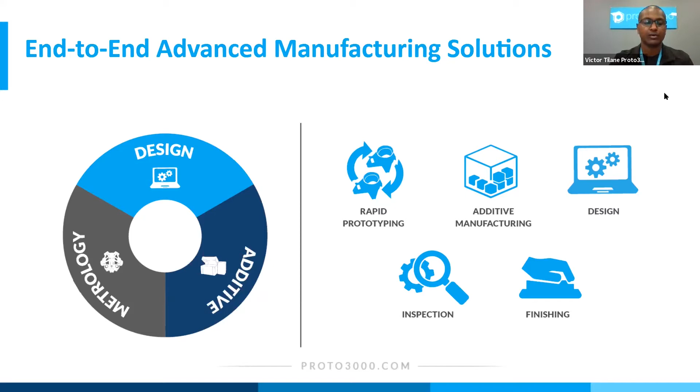Now, a lot of people ask us, why is manufacturing changing? Well, honestly, if the last 6 months is any indication, it's because it needs to. In the last 6 months, we've worked with quite a number of clients who have got a hold of us and said, hey, we're having massive disruptions in our supply chain. Can you help us? So that's where we've been able to use a lot of our additive manufacturing technologies and put it to the test.

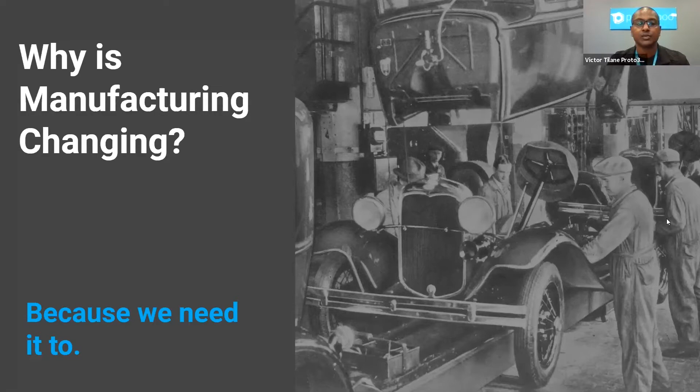I'm doing this presentation today, and we're just wrapping up close to about a 500,000 face shield order that we're satisfying for some of our medical clients. So we're able to turn things around pretty quickly, and especially in the last about 6 months, additive manufacturing has played a massive role in terms of filling in some of the issues in the supply chains. So what is additive manufacturing?

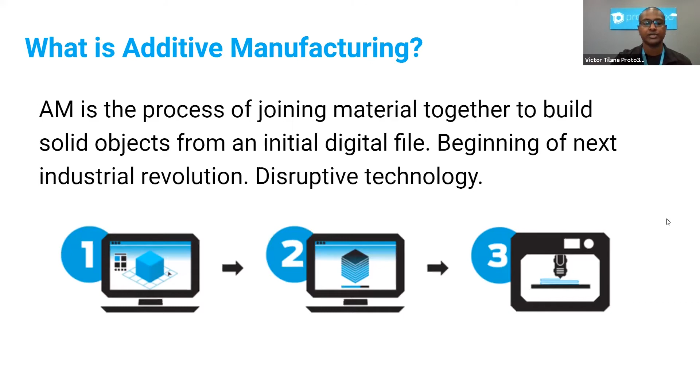Generally, additive manufacturing is the process of joining material together. Whereas in traditional manufacturing, you would take a block of something and machine it off. We start with nothing and grow it up from there. There are lots of different technologies that include this, but generally you start with a 3-dimensional CAD file. We're able to slice it, design it in a way and develop it so it can be read by a 3D printing machine, and then we send it to the 3D printer for producing.

GE, General Electric, has a really good saying that additive manufacturing is a transformative approach to industrial production that enables the creation of lighter, stronger parts and systems. This is very interesting because now you don't necessarily have to just make one part. You can actually make assemblies that are functioning as well. Additive manufacturing delivers a perfect trifecta of improved performance, complex geometries, and simplified fabrication.

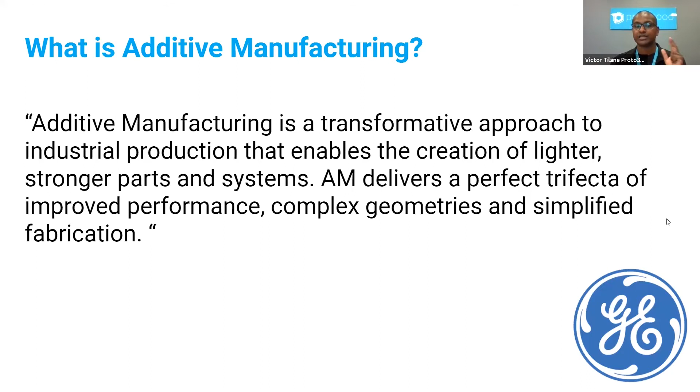So why additive manufacturing? Well, usually when people ask us for why additive manufacturing, they're already working on a traditional pathway or workflow. And the traditional workflow is already designed, and it's very compliant in a way. Now with additive manufacturing, when most people started integrating it, it was for rapid prototyping. With rapid prototyping, it shortened up the product development life cycles for a lot of companies.

In fact, I used to work at an injection molding company where we were able to tighten up that development life cycle from about 12 months all the way down to about 3, because we were able to use 3D printing and additive manufacturing for prototyping purposes. So by the time you went to actually manufacturing the final product, you're now at version 8 or version 9 of that product generation, rather than just having a single revision of the product.

Now, once you totally digitally optimize the designs, it opens up a whole different ballgame, right? The typical application or the way that additive manufacturing was integrated was, hey, we want to make this one part using a classical method. What 3D printing technologies are there to match it? Well, the new way of looking at it is a lot of companies and all of our clients are thinking, if we design this product for additive manufacturing, what would that look like?

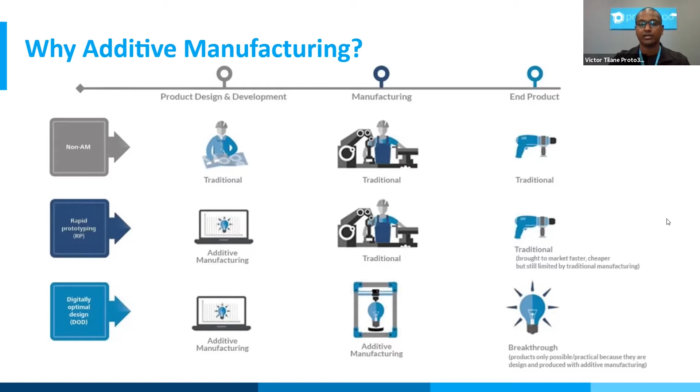So additive manufacturing equals design freedom and innovation. When you use additive manufacturing design and production workflows, you can consolidate assemblies, simplify your supply chain, and obviously improve the functionality and performance of the part. You can also unlock advanced lightweight, high strength geometries and topologies using some of the great softwares we have available. You can essentially eliminate non-cost effective or potentially poor performing parts as well.

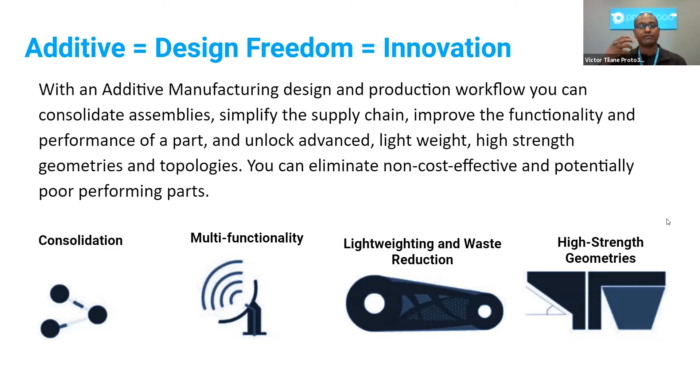So it transforms the way that you look at the way you design a product, the way the product functions at the end of the day, and maybe even sometimes the environmental impact and the sustainability of the product and the business as well.

So global adoption drivers for additive manufacturing are right across the board. Obviously, low-volume production has been a great adoption driver. A lot of companies that are looking for low production or high complexity or multi-sized production lines are looking into additive manufacturing, especially considering the new technologies and materials that are out there. Life cycle sustainability is a big thing.

Additive manufacturing is a highly optimized manufacturing process. There's as little waste as possible when you manufacture using 3D printing technologies. So as a result, companies can now use additive manufacturing as part of their sustainability value set.

Increased part functionality is another benefit. One of the ways you can design more functionality into a part, where it may not have been able to be manufactured using a classical method, is to now use 3D printing or additive manufacturing to make these parts.

Supply chain realignment is a massive driver in additive manufacturing, all the way from getting prototypes to initial market products to production parts, and even replacement parts programs at the end of the life cycle. Several major companies and programs around the world have announced they want to start using, or have already started using, additive manufacturing for their replacement parts programs, including some major automakers and electrical equipment and appliance manufacturers. That's a major driver happening in that area.

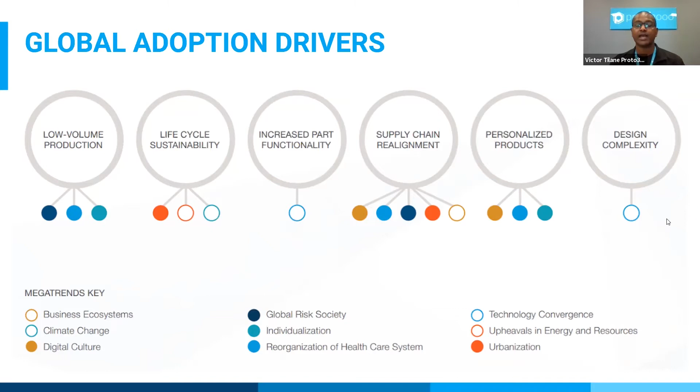Design complexity is another factor. You can design components for additive manufacturing that are highly complex—parts that may not have been able to be injection molded or machined can now be achieved using additive manufacturing capabilities. You can look at the shoe industry, for example, where there are several highly complex shoe designs that would never have been able to be manufactured any other way.

So just to wrap up, the advantages of additive manufacturing are essentially design freedom and market agility. You can mitigate the risks of tooling by testing things out very early on, reduce costs of the entire program, and achieve efficient low to mid volume production.

There's also a flow of companies looking to go from mass manufacturing to mass customization—we're seeing quite a bit of that. Additive also allows you to fail fast, fail often, and fail cheap, essentially letting you iterate very quickly through generations of product development, so the product that comes to market is relatively mature.

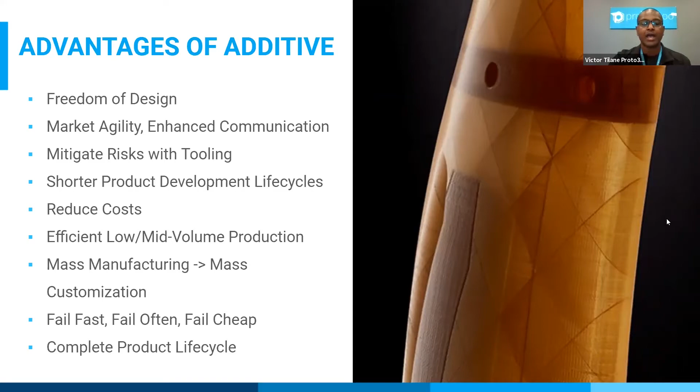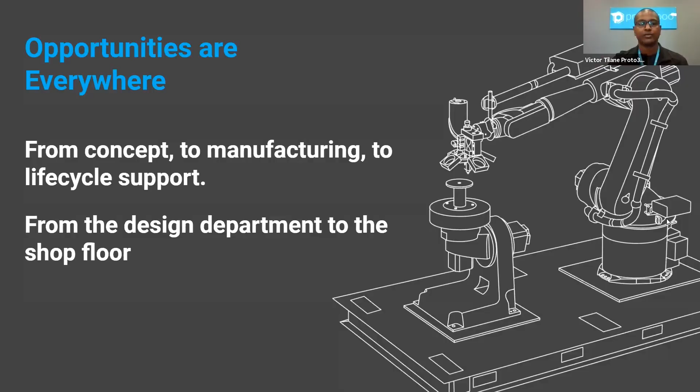And then there's the complete product life cycle. Additive manufacturing can be integrated into the complete product life cycle of a product. It has obviously, and for a long time, been used for concept modeling and prototyping.

And now more and more it's being integrated into testing and qualification of a product—for example, if a company needs to test what a certain fit looks like, they'll print that out, or you can make test parts to calibrate your automation systems.

On the manufacturing side, we're seeing quite a bit of low-rate manufacturing tooling, specialized shop aids like ergonomic fixtures, jigs and fixtures, as well as end-use parts. There are major manufacturers around the world, including some of our clients, using 3D printed additive manufacturing components on end-use products that will be out in the market for the next 10 to 20 years. It's a great application we're seeing in the manufacturing space.

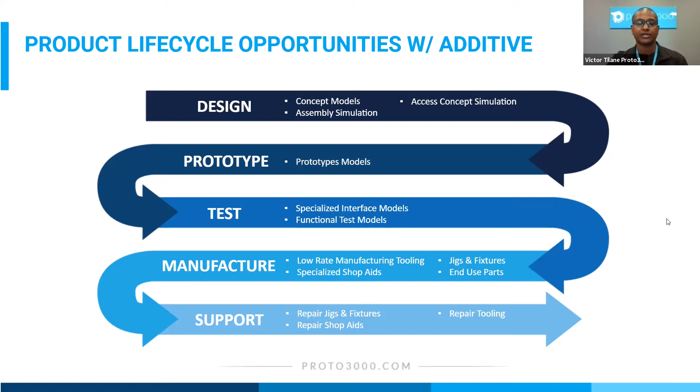And then at the end of the life cycle of products, we're seeing quite a bit of jigs and fixtures for repairing items or tools, or even using additive manufacturing parts as replacement parts programs. Having replacement parts in a virtual warehouse can be a lot more sustainable than having actual parts sitting in a real warehouse for whenever support is required. So across the board there are quite a bit of new and exciting applications and innovations in companies and programs using additive manufacturing for their benefit and future sustainability.

The most common applications for additive manufacturing have been prototyping, tooling, and production parts. In prototyping, you can improve time to market, doing things like concept modeling, design verifications, and functional prototypes. But now we're also seeing prototypes developed using additive manufacturing become essentially end-use production parts, because the parts are being designed to be additively manufactured from the start.

So after a couple of design iterations, we can essentially take that prototype and our clients can use it or sell it as an end-use item. We're seeing that kind of crossover quite a bit. And then in the middle we have tooling, where customized tooling is a major application in manufacturing, and sometimes on-the-fly designed tools that need to be applied and tested right away.

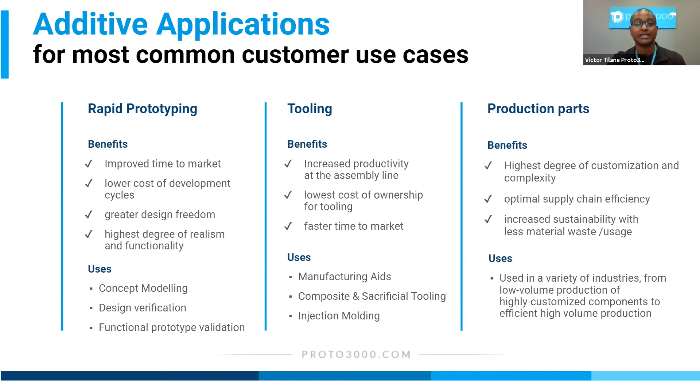We can help a lot of our customers do that, where they'll find a problem and work with them to put together a design, and then within a matter of 1 or 2 days, they'll have that tool so they can test it out in the real space. We had a tool we tested in a car automotive application where they needed a specific guide for a fastener. This was a very hard to reach area, so we designed a tool for it and sent it out to them within a couple of days. It was so successful that we ended up making several dozens of these, and this company sent it out to all of their assembly facilities across the globe. It was really exciting, a good example of tooling or additive tooling.

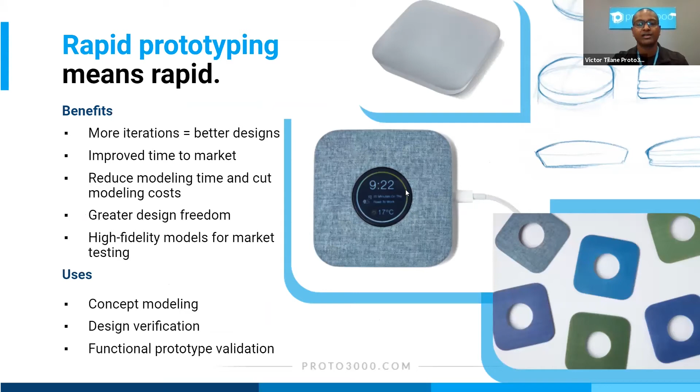So if you guys have any ideas for tooling or anything like that, let us know. We can help you on the design side as well as the manufacturing side.

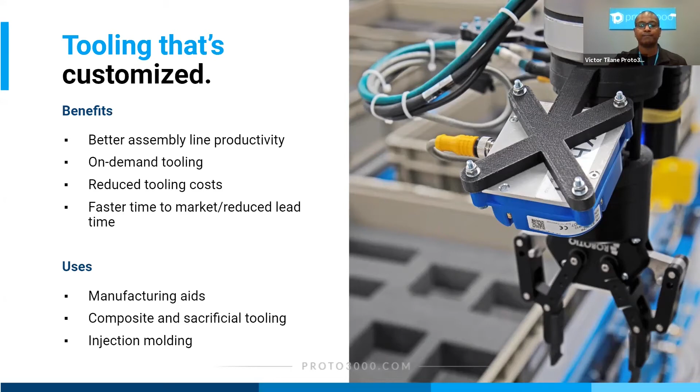More and more, from food manufacturing to automotive to general automation to even farming applications, we're seeing more companies and programs wanting to use additive manufacturing, and we're helping them make that possible. We've made tools as small as several millimeters across to as large as tools for farm equipment, where high wear items in the front of certain rigs we've been printing using our very large printers that can print 3 feet by 3 feet by 2 feet, very large parts. We've supplied these really large applications like farming and mining and those types of applications as well. So tooling is a very large area that additive is helping out with.

Now, durable production parts has been the goal of additive manufacturing from day one. However, technology is just coming around to offer high degrees of customization and optimize the supply chains by having parts that are as good, if not better, than the original parts made with classical technologies, and also made with materials that are very flexible. So we can make parts that are clear to opaque, flexible to rigid, or anything in between. We can even make parts with multiple materials in between as well.

Some of the industries utilizing this technology right now include consumer goods such as shoes, aerospace parts has been using it for a long time, and then high performance and low volume parts as well.

Excuse me, I'm going to turn off my phone here. That's very embarrassing. So let's keep on going here.

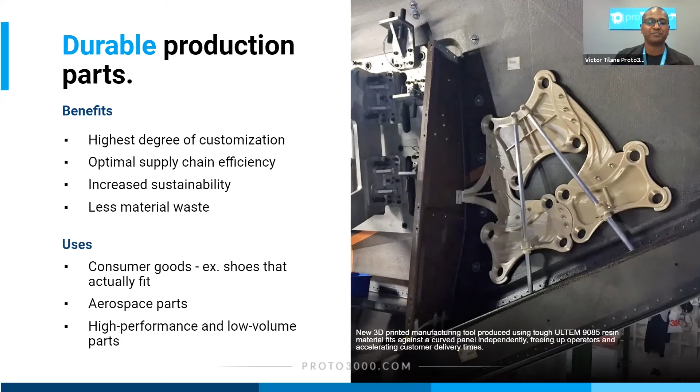So additive manufacturing processes and technologies - there's probably about several dozen major additive manufacturing technologies, but I'm going to focus on just the ones that we help our clients with. If you have any more questions about other additive manufacturing technologies or how they can help you, feel free to reach out and we can have another discussion along those lines.

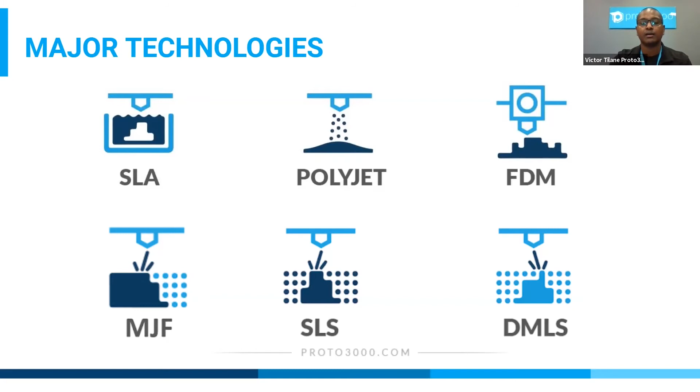Some of the major technologies out there are SLA, which uses a resin to build a part up, or POLYJET, where we use a resin and spray it down layer by layer to build parts. FDM is very popular - it's essentially like a glue gun that builds layer by layer by layer. Multi-jet fusion uses powder and we spray a binder material on it, and that makes incredible parts. SLS uses powder and lasers to build the parts, and DMLS uses metal powders and lasers to build parts. These are very popular applications, and more industries are finding quite an interesting amount of applications there.

One of the major technologies we have in-house - Proto 3000 is one of the largest centers for POLYJET 3D printing. POLYJET is the highest resolution 3D printing technology there is. You can build incredibly thin walls, make parts that are clear to opaque, flexible to rigid, from one color to another. It also offers quite a bit of functionality. Because of the resolution of the parts we can make with POLYJET, we can produce parts for tooling, for example, or those types of applications.

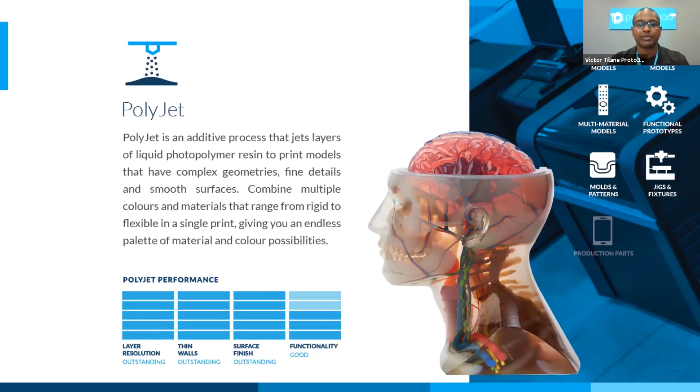And we can print in about 500,000 colors, multiple materials all at once. So if you're trying to do overlays of parts and things like that, we can do that.

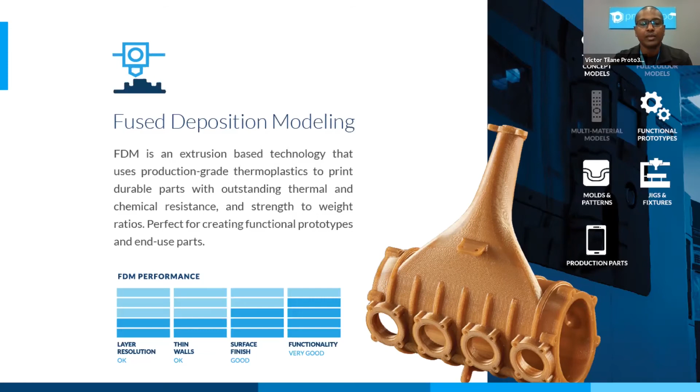FDM, or fused deposition modeling, is more of a rougher material, but it's a very functional material. It's a very mature technology, so we can make quite a number of products using a various selection of usable materials as well. Anything from nylons to polycarbonates to ABSs to even really high performance materials, and I'll talk about that in a little bit here as well.

Multi-jet fusion is a very new technology from Hewlett-Packard and several other companies, and we have massive capabilities for multi-jet fusion in-house. It is one of the closest additive technologies to injection molding or machined parts there is. A multi-jet fusion part is isotropic inside, which means no matter what angle you cut it, it maintains similar physical properties and strength properties.

This technology is also about 10 to 50 times faster in terms of production. So we can really justify using a technology like this for production purposes. In fact, the hundreds of thousands of face shields that we're producing for some of the COVID-related programs right now, we're using this technology because it's very fast and it produces components that are highly functional and very durable.

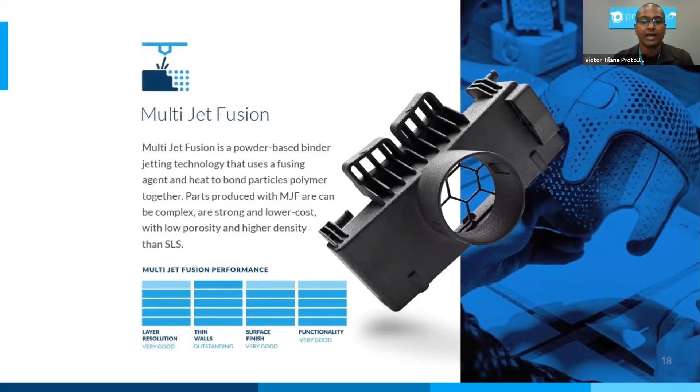Stereolithography is actually the original 3D printing technology. It allows for really high layer resolutions, quite a number of materials. It's not as functional, but it does offer quite a bit of functionality if you're trying to produce clear parts or very smooth parts or high finished surfaces and things like that.

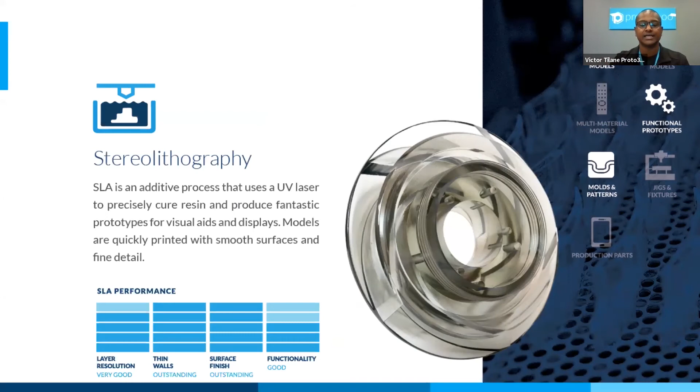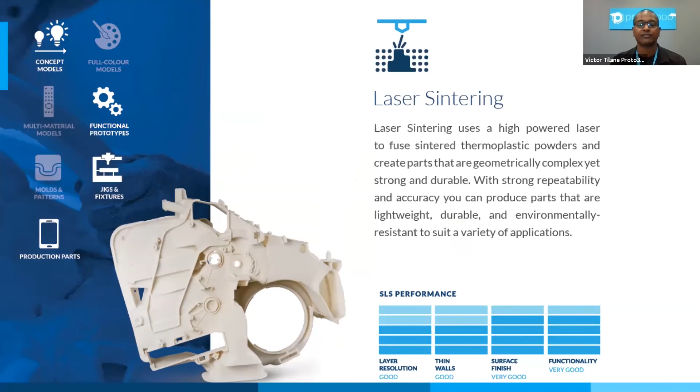Laser sintering is also older technology. It does produce a rougher material, but you do have the options of quite a bit of material powders and things you can select from, including nylons and so forth.

So when does additive make sense? It really depends on—a lot of our clients reach out to us early on in their project development and product design to figure out what technologies will fit whatever you're doing. In terms of product ideation and design and testing, and even market introduction and pre-production parts, that's where some of the latest technologies like multi-jet fusion and DMLS, direct metal laser melting or sintering, will actually work out. On the product ideation and prototyping side, that's where technologies like POLYJET, SLA, FDM, and laser sintering and some of those technologies really make sense.

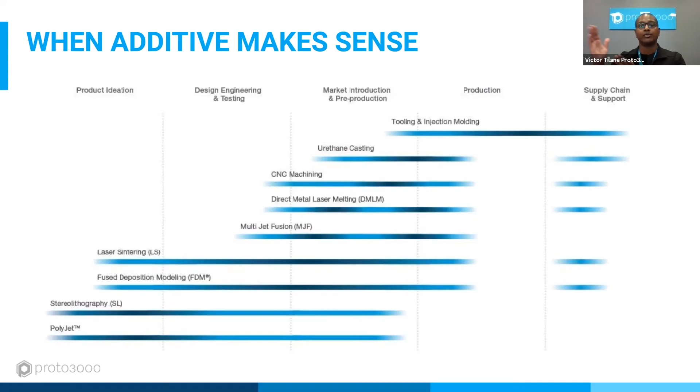Eventually, though, once the additive technologies become a little bit faster, I think we can get more and more into medium to high production numbers. And that's going to happen really soon as we watch this space.

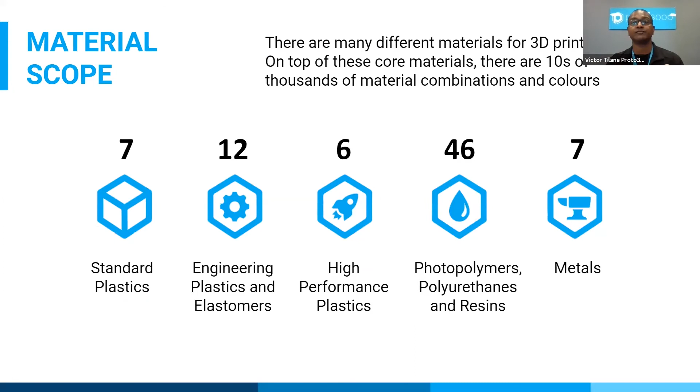Additive materials you can sort of split up into standard plastics, engineering plastics and elastomers, high performance plastics, photopolymers, and then metals. We have sort of a list or numbers on top of there—that's the number of plastics that are available, but honestly, on a weekly basis, there are more and more polymers and metal mixes that are being developed. If you're interested, you can also develop your own metal or plastic technologies available. With these materials, you can select and design for heat resistance, biocompatibility, chemical resistance, UV stability, high strength, transparency, elastomeric properties or static properties or rigidity or toughness or anything like that.

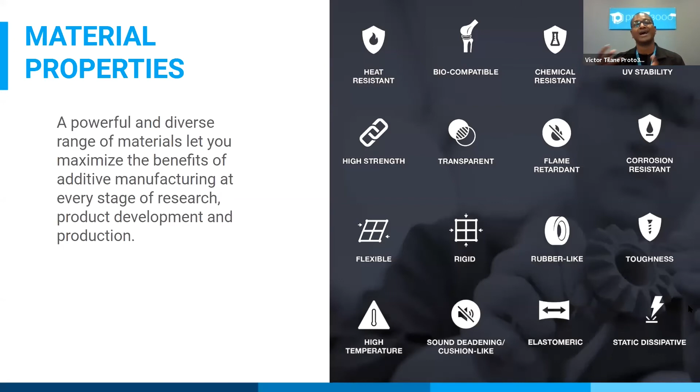So additive manufacturing is going the way of classical technologies where the material science is really starting to catch up.

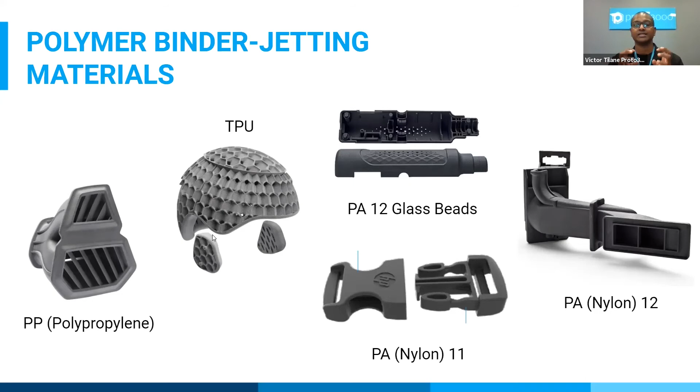One of the technologies I wanted to talk about is polymer binder jetting material. This technology allows you to make parts out of nylon, TPUs that are flexible, glass bead materials that are nylon, which are very rigid. This is the technology from Hewlett-Packard, the multi-jet fusion technology, where you can print thousands of functional components because it's very fast, and also the material is isotropic, very similar to an injection molded plastic material.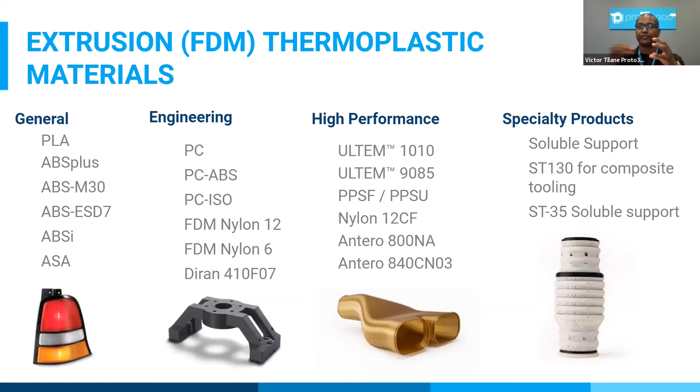These are some of the FDM thermoplastic materials, anything from ABSs to polycarbonates to Ultems and Anteros, which have really high temperature resistance capabilities, to also soluble materials where you can produce a soluble part, wrap fiberglass or carbon fiber around it and melt the inside out, and then you're left with your part. So you can make sacrificial parts like that as well.

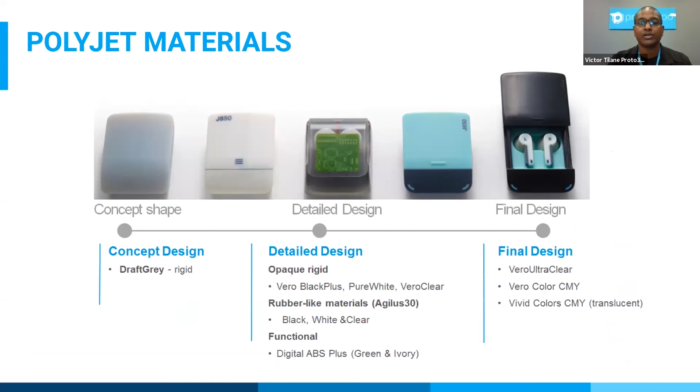So this is an idea of what POLYJET materials look like. As you can see, you can produce parts that are anything from a concept to detailed design of the inside to final product, which with certain textures and etchings and all those details that you're looking for. So technologies like POLYJET are very flexible in helping that design life cycle.

So, industry uses and case studies. I have about 5 of these and I'll blow through them quickly.

Aerospace is a very big industry where additive has been used. It's been used for things like wind tunnel testing, where you can produce a prototype vehicle or a component. You can create carbon fiber layups for it, or sacrificial parts. You can also produce surrogate parts for testing out an automation line, or composite aerostructures for tooling, and also production parts. We actually produce 3D printed production parts using Ultem that are being installed in flying airlines right now, and we've been doing this for probably the last 10 or 15 years.

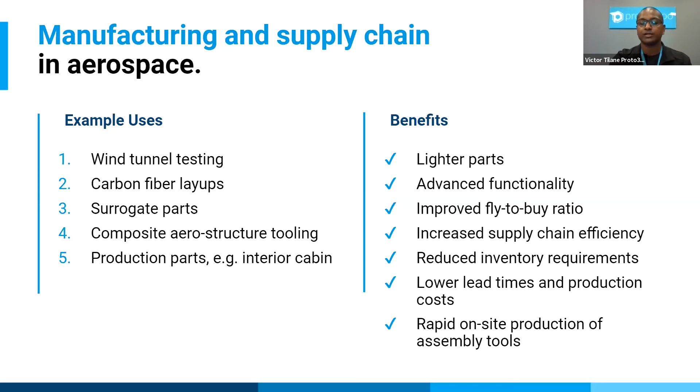In terms of benefits, using additive you can produce lighter components, advanced functionality of the components, improved fly-to-buy ratio, where you can produce parts that are almost ready to go. Increased supply chain efficiency, reduced inventory requirements. We produce additive manufacturing components in line with our clients' timing requirements for installation or assembly times, and rapid on-site production of assembly tools can happen using additive manufacturing as well.

The Airbus A350 has over 1,000 flight-approved FDM 3D printed components. That's a really interesting fact, a very successful airline in its regard. In order for them to meet the very strict timelines they had to get their vehicle to market, they just skipped the tooling and went with high performance plastic additive components, which not only saved time in terms of the aircraft getting to market, but also saved time and space in terms of inventory. They were able to produce the components as they needed them.

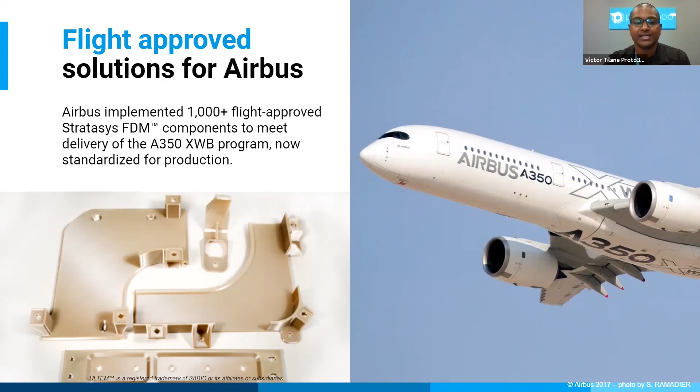Very interesting application. Automotive and automation is a very big area. A lot of automotive companies are starting to use this technology, obviously for concept modeling and wind tunnel testing, but also soluble supports for carbon fiber applications. For example, hollow carbon fiber wheels are being produced by several manufacturers right now using soluble 3D printed parts, wrapping the carbon fiber around, melting the inside out, and then you have your part.

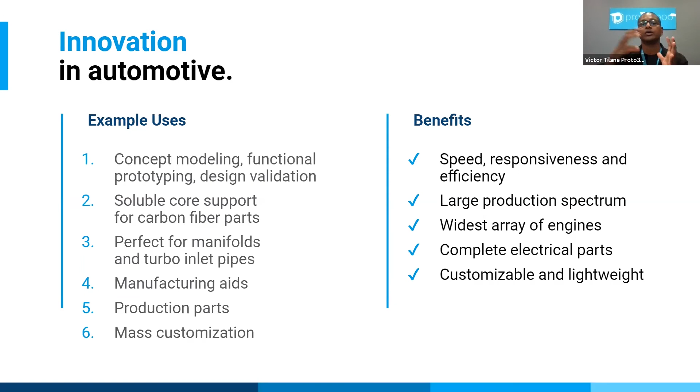Several major companies, like Ford, VW, and BMW, have announced that they are producing additive manufacturing components for their vehicles. In fact, I believe BMW announced they just produced their millionth additive manufacturing part. And smaller programs like the Mini program from BMW are offering 3D printed customized components that clients can order, which will be shipped out to be installed on their vehicles. Really interesting applications going on, where typical mass manufacturing industries like automotive are now looking into what they can do with mass customization.

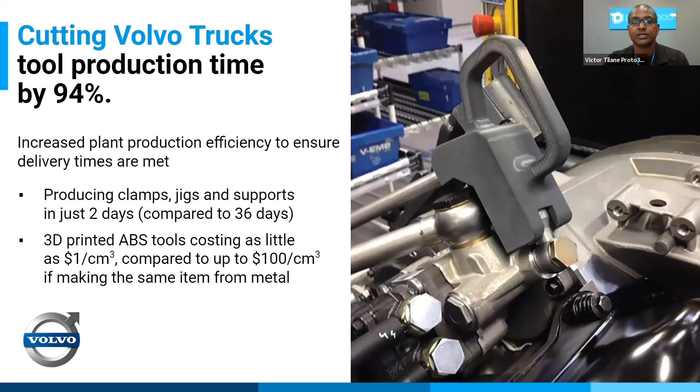Volvo Trucks had a really good application for this, a tooling component they needed to produce. They essentially saved about 94% of time in terms of producing this component. I believe they were able to produce the part in 2 days compared to what it would have taken, about 36 days, using their classical way of producing this component.

Healthcare is also a very big industry that is using 3D printing. Orthotics, bionic prototypes, pre-surgical models — for example, if you want to practice on a specific surgical model of that patient before you actually work on the patient. Personalized prosthetics is a big area.

In fact, we have supported Canada's winningest cyclist, Shelley Gautier, for whom we have designed, optimized, and made components using additive manufacturing technologies. Using our HP multi-jet fusion technology, we produced her prosthetic bracing for her arms and legs, as well as customized handlebars to fit the way she rides the bike. To this day, she has probably put on about 1,000 hours on all of those components, and those components not only met the performance of the original components, but beat them — they were either lighter, stiffer, or more comfortable. It's a great real life application for personalized prosthetics.

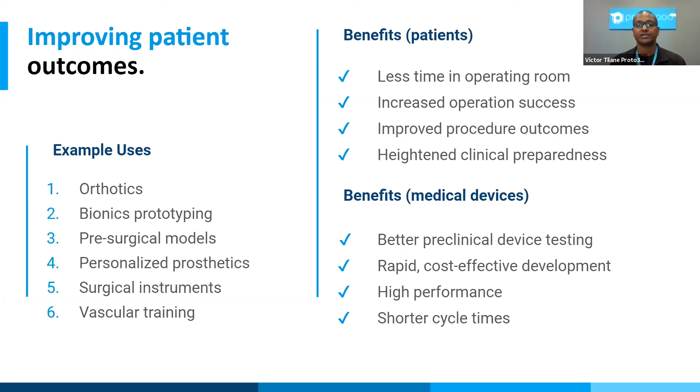Surgical instruments and surgical tooling is a very big area where we're using additive manufacturing, and also medical simulation, things like vascular training. The benefits are similar to some of the other areas: less time in the operating room when using pre-surgical models, improved procedural outcomes from medical simulation components, and better standard of life for the clients or patients using prosthetics, bionics, and orthotics.

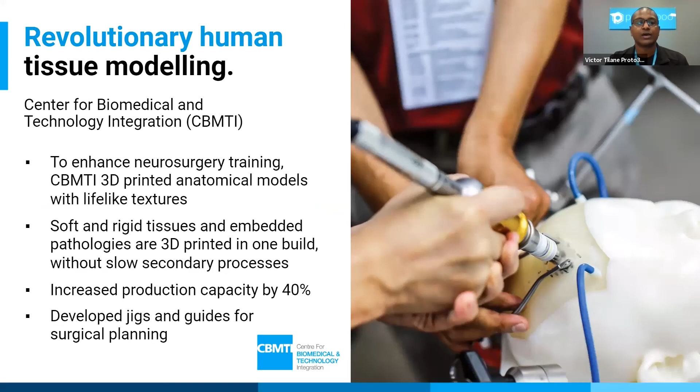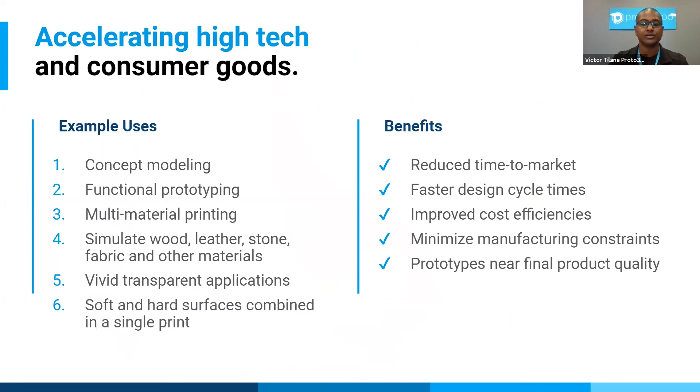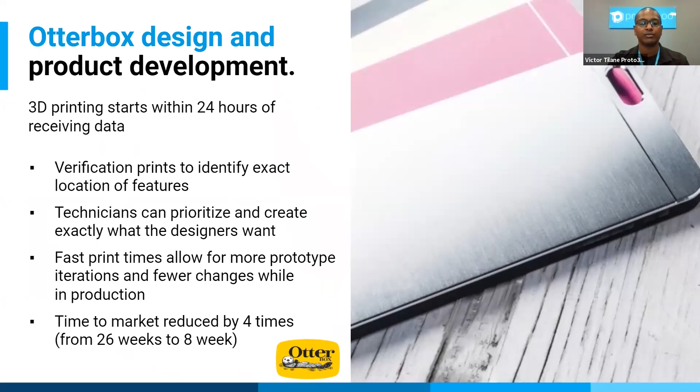One of the areas we can do with PolyJet technology is modeling. The final application is consumer products, where we work with a lot of clients to produce consumer products for concept modeling and even end-use components. OtterBox is actually a really good example, where they started with 3D printing some of their products before going to market.